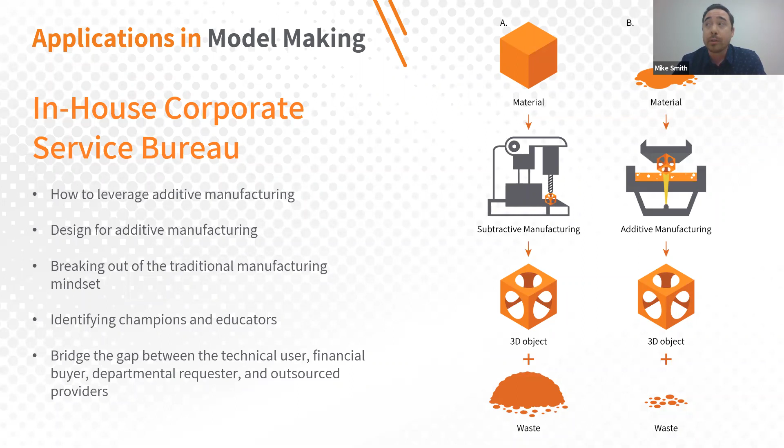I think having a single entity that overarches and does the additive completely is beneficial for us. Too many moving components can bring up that same issue as before. So generally, once we decide on the technology, I might push someone to be more of the on-site owner to run the machine, but the planning and progress generally comes from a single source.

Yeah, that's great. So coalition building, but having someone who really owns it end to end to help build that consensus and make sure there aren't missing gaps or silos. Yeah, that's fantastic advice. Okay.

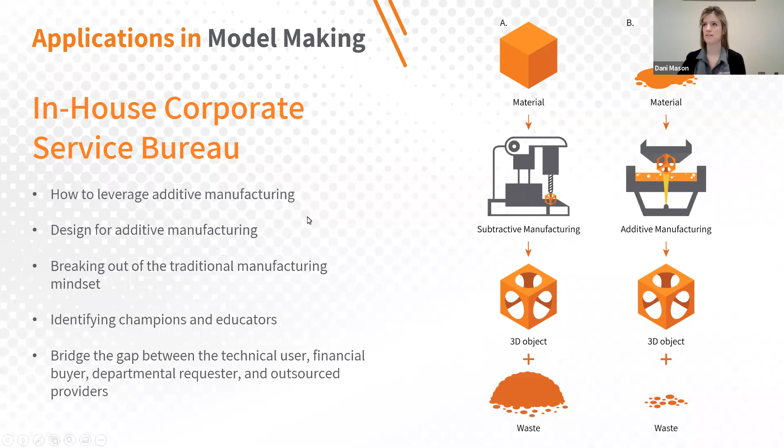All right, that was excellent. So thank you, Mike. Paul, welcome. I'd love to hear from you how Crown is leveraging additive manufacturing.

As we're leveraging additive manufacturing, it's really a supplement to our current manufacturing applications. Of course, like a lot of large companies, we do our own design of product. We're very vertically integrated, so we've had 3D printers around for a long time, used in many different ways as we've grown in our design capacities. But now we're really starting to grow into truly additive manufacturing, and we're looking at it more now as an enterprise strategy.

I think that's a little bit of what Mike was alluding to with some of those connections and finding those people. One of the downfalls of additive manufacturing is its own name, because additive manufacturing, I've never believed, is just a way to build things. Additive manufacturing is actually an enterprise strategy. That's what we're trying to do now, incorporate it into all aspects of the enterprise, starting with design through production. It touches operations, accounting, and marketing in many different ways. Not just trying to find those individuals in all those different aspects of the enterprise, but helping get them to communicate towards that common goal. So that's really where Crown is right now in our growth with additive manufacturing.

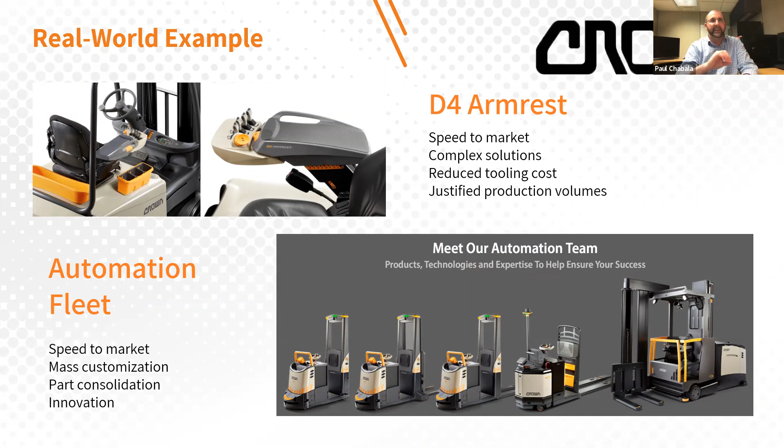When you think about it, it's the vehicle and the base platform, but every client has a different type of design or distribution center that these vehicles run into. So we can really help specifically focus the added extra design of the vehicles to each client. That's amazing - that's all of the things you want to use additive for wrapped up in these two product examples. Thank you for that.

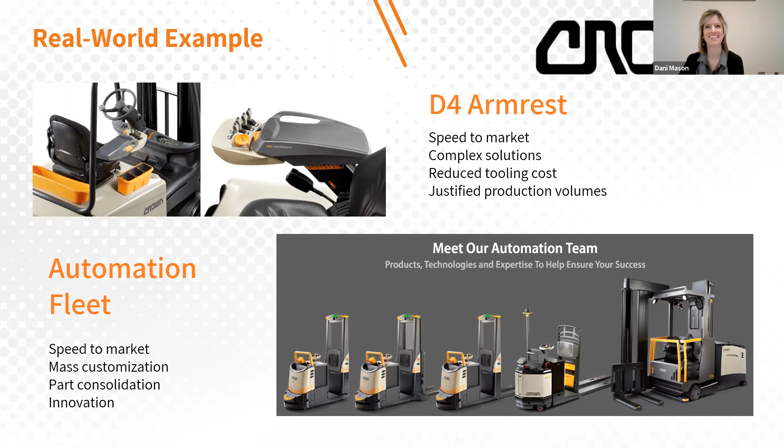All right, Charles, I would love to hear how LGM is using additive.

Well, we've been using additive since we bought our first machine from what was then Z Corp, now 3D Systems, back in 2000. So we were early to the party. And we've grown up with additive - what was first rapid prototyping, then 3D printing, and now additive manufacturing. I think as the terms have changed, the applications have changed.

But we have used it really - in 2000 we said, how can we produce more than one model every week, or one model every 2 weeks? LGM is a traditional model shop, but I came from a technology background in aerospace and defense, so we've always been technology leveraged, where we're going to select the best technologies that help us to produce our end product. So we're not a traditional service bureau in the way that some of the captive, big service bureaus are.

But we do send boxes out the door, and that's our product - the actual model itself. So we had to look at how do we scale, but still provide the absolute best quality product to our architects and to our designers, to our sales teams, and our museums and our other customers.

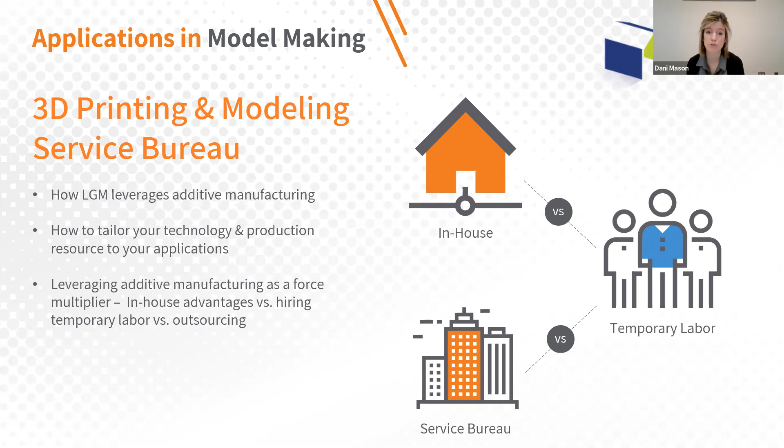I also want to give you an opportunity to talk through some real world examples where you've used additive. So would you share with our audience about these projects?

The house, the white house in the top left, is very much our traditional product that we've been making for 25 years for architects all over the world. This was really the case where I used to build these, like a lot of people on this call, late night, all night, with an X-Acto knife. That was what we really had to scale.

So we brought in, at the time, the Z-Corp printer—I think this is Z-Corp, but it has SLA windows. We've really perfected the technology and the workflow that allows us to create these from the architectural geometry, whether it's a small house model or a large industrial model like the one below, the Ballston Quarter. That's really our bread and butter.

What we've been doing a lot in the last 10 to 15 years, though, is we realized we had an expertise in color printing that was fairly unique. So we've been asked largely by other companies to do sales aids, industrial aids, cutaway models, these types of things, producing a lot of those using several different technologies. We're excited about the Mimaki technology, and we brought in MJF to do those. We do production runs anywhere from 5 to several hundred, or in the case of Epson, several thousand, aids used in a trade show or sales environment. That's something that has grown our business because of our core expertise in color and color rapid prototyping.

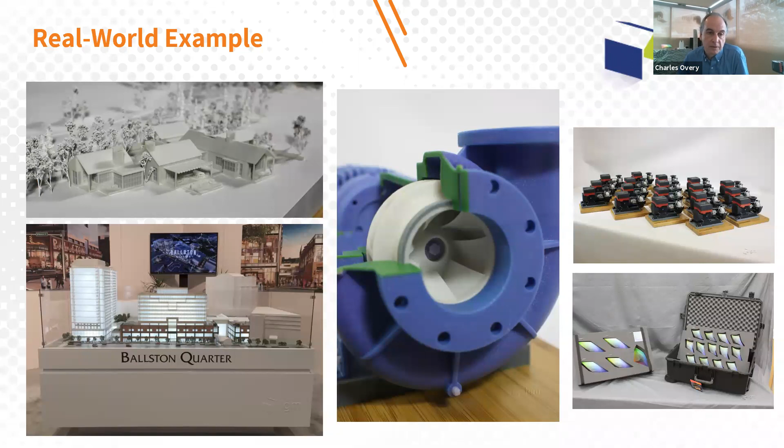Excellent. Thank you. Okay, Shon, you're up.

Can you talk a little bit about B9 Creations? Absolutely, and I apologize in advance if it looks like I'm looking away—I'm actually making notes because I love some of what Mike and Paul and Charles shared, and they hit on some really key points that I'll circle back to.

For us, as a company that manufactures this technology, I run into a lot of different expectations—everything from, well, are your 3D printers 3D printed? As I think everyone on this call would agree, the answer is no. We do use additive manufacturing where it makes sense, but even for us, we recognize as engineers and production professionals that additive is a tool in the toolbox. I always use the phrase: you never saw a guy back up a truck to build a house with just one tool.

You know, he has an entire truck full of tools, and producing a product or bringing a concept to market is very much the same. So for sure, we leverage additive in everything from how we prototype components to how we iterate, to things like jigs and fixtures.

We're getting ready to implement a new process in our manufacturing floor based around a new VAT technology. One of our engineers, I was in here a couple of days ago, and he was in the back post-processing a bunch of weird looking parts. I said, what in the heck are you making? And he's like, well, this new machine we bought to utilize in our VAT production process, these little pieces, if I buy them from the manufacturer, they're 12 bucks a piece, and I just printed 10 that aren't their design, but work equally well to do what we need to do for about $1.

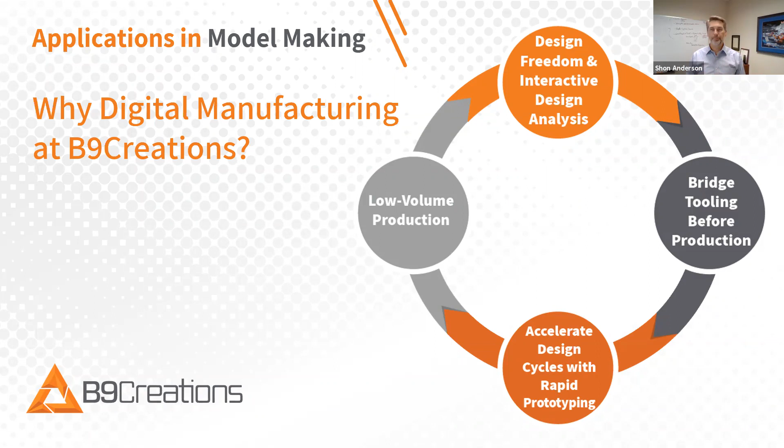That's great. I'm going to put up a slide here so they can see what the young engineers are making additively. I also think it'd be great if maybe you could share a customer example of how they're using additive, potentially our customer in the UK.

Absolutely. And please don't anyone misunderstand and think that I'm against injection molding - not at all. We use it on a number of the components that go into the platforms we produce. It's about being prepared to move to injection molding when the time is right.

But we've got a customer in the UK that is now doing production volume runs. And by that, we had a fun conversation amongst the panelists as we were prepping for this. When I say production volume, he's talking about 2,000 to 3,000 units, running them straight off of our additive manufacturing platforms, rather than tooling up or some other approach.

And in our prep session, forgive me, I can't remember who brought it up, but we were talking about this concept of production, low volume production, prototyping, and one of the other panelists posed the question: what is the definition of production?

I think that's changing as additive becomes more capable. There's the ability to go to production, air quotes intended, before required. Internally in your company, you've got to pass quality, regulatory, and a whole lot of hurdles before you can move a product into production. What if you could start jumping those hurdles or stage gates in your product release process using additive instead of final production, because your additive was so good at low to mid volume that you could do those validations with additive?

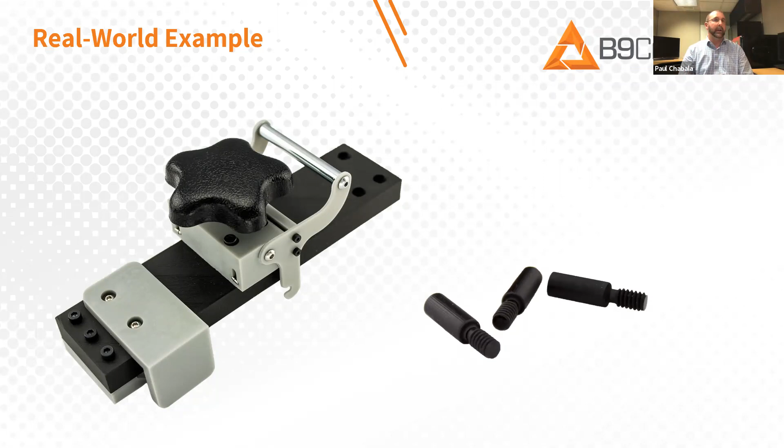Thank you, Paul. Mike or Charles, did either of you want to chime in? Yeah, similarly, I completely agree. We've utilized some of our low volume production machines, specifically SLS machines, to help bridge that gap before we go into full production with production grade materials—getting full functional models out the door that work properly in the environment they're supposed to work in, to validate the designs, validate the processes used on assembly, and validate the function of the model itself before ramping up to full production at large scale. So it's completely true that additive is very useful for bridging that gap.

The only thing I can add is that one of the machines we have in-house now, one of the new technologies, has a great number of additively manufactured parts, and you can tell where that selection criteria was made: complex manifolds, transport manifolds, in metal as well as nylon parts. You can see, when working on the machine and doing all the maintenance that has to be done to keep it running, which parts were chosen to be additively manufactured. I don't think those are pre-production parts—maybe with this machine, but I think they're actual decisions, given the volumes they're expecting to make, to use additive in the final production machines.

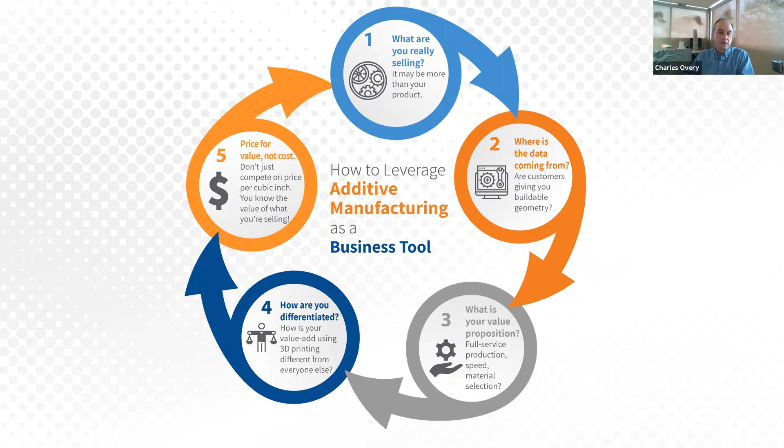Maybe Mike gives you a cost transfer of several thousand dollars, and you're like, oh my God, that's way too expensive. Well, what's the solution that Mike's actually providing? Not just the cost per cubic inch for that single part.

I think that's great to think about how to leverage additive as a business tool when you're considering adding or upgrading or outsourcing your 3D printing capabilities. And that's a really nice transition point over to you, Mike, to switch from business to what are the technical and regulatory considerations? How do I sort through this sea of tech specs and figure out what the heck this machine can actually do? Could you talk a little bit to that?

Oh, and I think you're muted, Mike. Hang on, let me take myself off mute. There you go. Oops. And we're good again? Yep, all right.

That's a very important thing to discuss, actually. Depending on the city that you live in and the municipalities, certain systems are not regulated. So for us, we ran into an issue a few years back where we wanted to implement a DMLM machine into our facility. And in order to do that, we had to reach out to the fire marshal, we had to reach out to our EH&S team, we had to reach out to the building owners and whatnot, because there were massive amounts of regulation that went into setting up a system like that. So looking into what the capability, what you're able to actually implement in your own building is very important when sussing out what technologies you want to add and what's good to keep in a vendor situation.

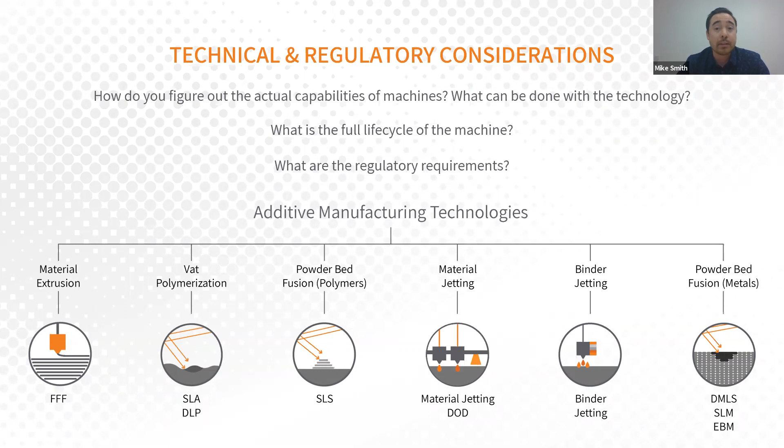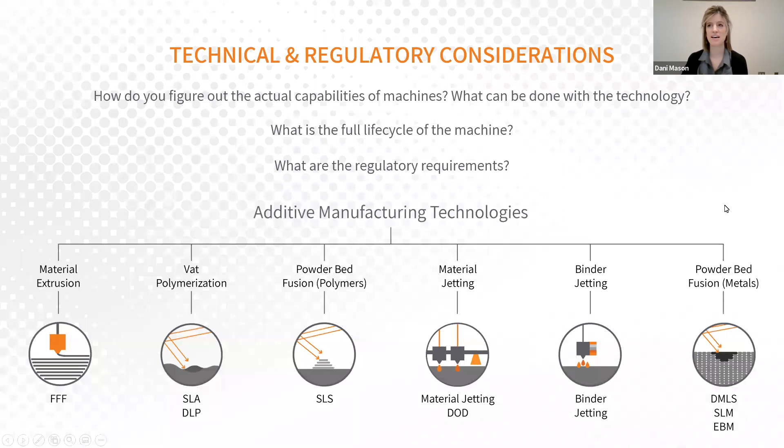That's fantastic. We're going to circle back to a question we had earlier about what is the definition of production in this age of additive. I'd love to get some more of your thoughts, Paul - is there still this line between prototyping and low volume manufacturing, or is it all short run?

Sean brought this up earlier - what is this changing definition of production in the age of additive manufacturing? Really, it starts with looking at the change in the life cycles of products out there. Traditionally there was a basis for the determined life cycle of a product, and designing toward that goal. Now we're starting to see, because of new technology coming out, those life cycles are actually shortening to a degree.

Largely because we're in the age of Industry 4.0, the age of big data, and that's really driving rapid adaptation in design with constant feedback. So new manufacturing is really about adaptation - how can you use the existing manufacturing processes and the new technologies in order to keep that adaptation going.

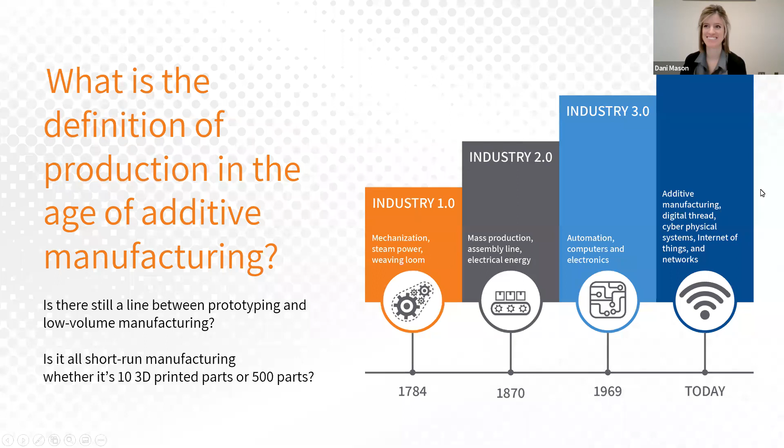Paul, I don't know if you want to touch on any of these points as well. You may have covered some of them, but anything that's helpful when you think about implementation of this technology?

Yes, so for implementation, I'll steal some comments made by Mike and Charles earlier. Change management has been a real focal point here at Crown. We have very high quality product that goes out the door, and that comes from years of engineering experience with stamping, welding, and tooling. You think about big large metal boxes rolling around, they're very heavy, and it takes a lot of engineering to go into that. So when we start disrupting that type of design process, we need to make sure we're having a transition in the thought process that goes into it.

We start to look at some of the younger engineers coming out of school. They're being taught these processes right off the bat, so it's kind of the student teaching the teacher aspect when bringing in these new technologies. Whereas it used to be that experience came from the top down, now we're trying to filter some of that knowledge from the bottom up. It's a bit of a give and take, and that takes some change management.

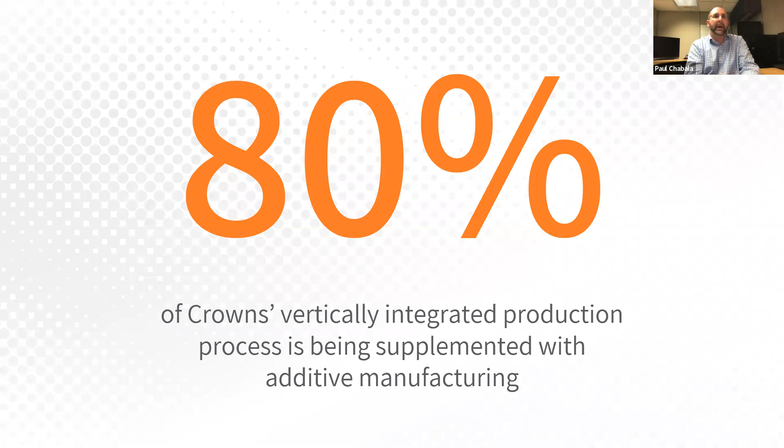So in an 80% vertically integrated situation, you want to disperse it as much as you can, finding that low-hanging fruit, continuing along those paths, and then allowing it to coalesce back into, ultimately, a better product at the end of the day.

Excellent, thank you Paul. Charles, you had two interesting questions here. One was not just how do I think about what to bring in-house versus service bureau, but when do you become the service bureau because you have all of this additive capability? Could you talk a little about how you think through those aspects when building a business case for a printer?

Oh, I think you're on mute, Charles. Hang on, sorry, I'll keep it. There you go, sorry about that.

I think that when you look at what to bring in-house versus what to outsource, for a business there are these small and mid-range machines that are sort of a no-brainer to me - though some might take contest with this - whether you want to put the source of production close to the designer or not.

I would argue that if you need it fast, if you need to iterate in 24 hours or less with some machines these days, and you don't really care about quality, and it's a machine you can put on someone's desk that doesn't have to run all day every day to pay for itself, and it has low environmentals, then I think almost engineers and designers are starting to expect that - particularly kids coming out of school who've had one in their dorm room or at the lab. There's a tangible benefit to being able to touch it. But if you expect the best quality, if you've got to put this part in front of your customer, if you expect more than one or two off that machine, if you expect repeated parts, if you expect people not to get distracted by the production flow, by software issues and other issues, then you want to look at outsourcing or centralizing in a lab.

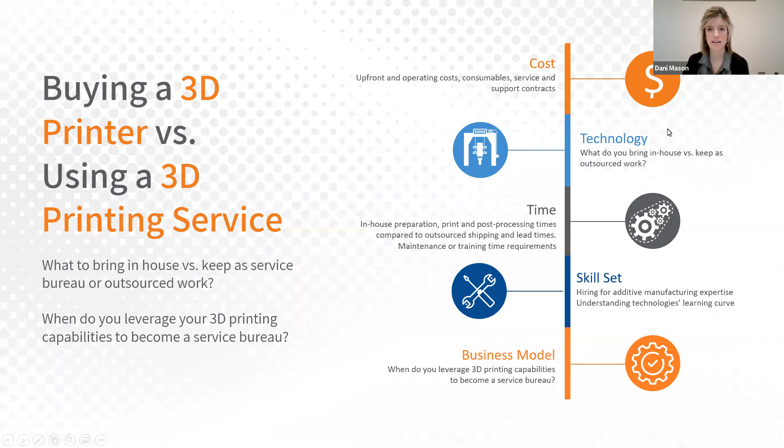Absolutely. I'm building on comments from Mike, Charles, and Paul previously here. It's amazing to me that when people think about additive manufacturing, they tend to want to throw out the Bible of manufacturing, which is lean production methodology. They say, what I need is a printer with a build area the size of a football field so I could make 400,000 parts per build. And I'm like, actually, that's a terrible idea.

What you want to look at is throughput. Think about how you optimize cycle time, takt time, and the entire workflow - not just the printing piece, but post-processing, cleaning, curing, and whatever else goes along with the technology you're considering, and think all that through.

We worked with a customer, and are still working with them, that has about 900 locations around the US. They were being pitched very hard to build a many-million-dollar centralized additive manufacturing facility. I asked the CEO, so when you've built that facility, how will you get the parts to all your different locations? He said, probably FedEx. I said, so you want to spend $50 million and at the end of the day still be dependent on what time the FedEx guy picks up? He cocked his head a little and said, well, what do you mean?

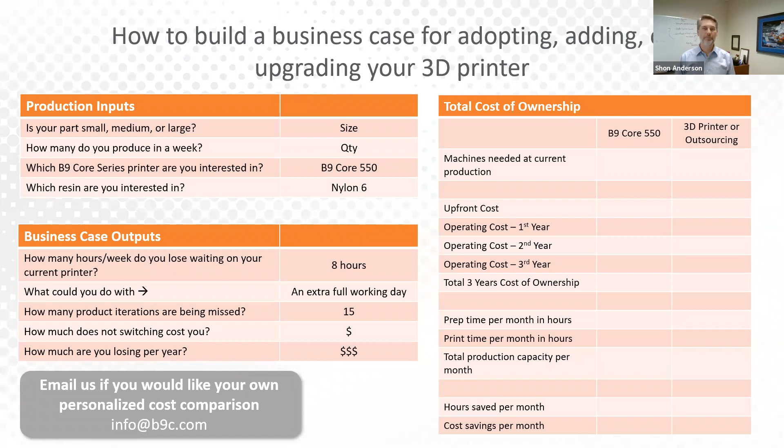Yeah, that's great. So we wanted to wrap this up—it was a lot of great information, but we're, as Charles said, in a great pause.

And we want to acknowledge that and offer some tips on how each of our panelists has been working through this new environment and adjusting to it. So I want to start with you, Mike. You had an almost entirely in-house production method, and all of a sudden you had a work-from-home mandate quite early on. Can you talk through how you went through that adjustment?

Yeah, actually we found ourselves in a pretty interesting situation. In California, we had the shelter-in-place mandate pretty early on. Before that though, we had a suggested work-from-home situation. During that time, we were able to leverage our in-house machines pretty effectively for situations where some of the production facilities in other countries that had been affected more during the beginning of COVID were not able to develop the parts we were doing, the fixtures for testing, and they also had issues with some of the injection molding tools that they had. So we were able to produce those in-house on our internal machines and ship them to the areas that needed them, to bypass some of the supply chain issues we were having.

But then once we also got the work-from-home mandate, we really had to leverage the supply and vendor network that we had created over the years for outside-of-state vendoring systems and colleagues. Luckily, we have set up some satellite labs around other facilities of our company, but utilizing that large vendor network and really leaning on our colleagues and partners has been a huge help for us.